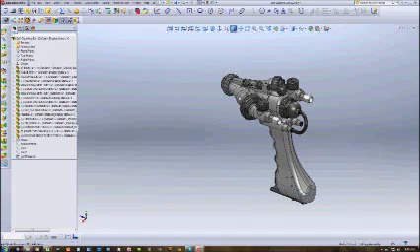This is Pat, and here's the Wagner spray gun. So we can kind of spin it around and take a look at some of this stuff. The gun was designed to solve a lot of problems. Some of the problems are as simple as just cleaning up at the end of the day.

And when you're spraying inside of tight quarters, overspray kind of flies around all over the gun. And so there's an overspray shield that goes over this. I'm working on that today. So just remember, one of the last figures in the patent is going to be an overspray shield that snaps over this. It's very similar to packaging. I had it on another design, but this design has me starting over again on that one. And we'll include that in the documents that are coming over.

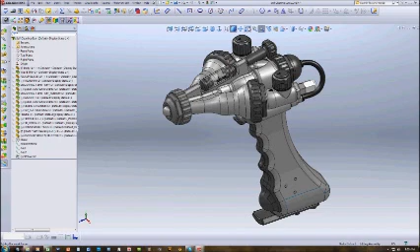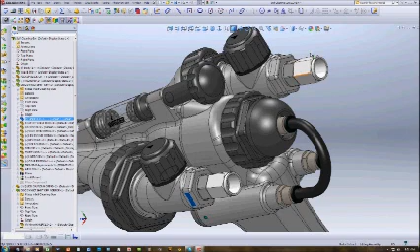So here on the right, this is polymers coming in. They screw into these stainless steel fittings in the back, and it's high pressure fittings. So these are actually swivels here, and this swivels and this goes into this aluminum body here. So these are mirror images, and we've got wrenches on the fitting here, so when you tighten it, you can tighten it up, and we'll probably put Loctite in this in production so this doesn't back out. And then these swivels, so you can disconnect your hoses here. So that's the incoming material.

So this gun is designed to work with what we refer to as off-ratio blends and polymers. So they're plural components, so one side comes in this side, the other side comes in here. Usually one is labeled A, which is the resin, and B is the hardener, generally an isocyanate. So we're going to work with epoxies, ceramics, urethanes, polyureas, polyaspartics, structural foam, insulative foam, and they'll all process through this gun.

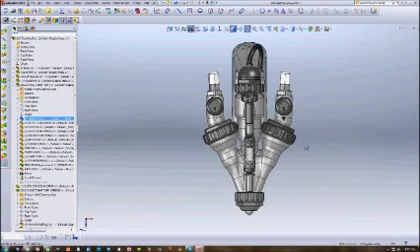And one of the problems that happens in a gun is that they jam up. And guns have been traditionally designed with tight tolerances, and this particular gun has loose tolerances, and we'll show you why. So there's working parts that are inside of here. The air comes in through the back to push a pin through, and the pin pops out here on the end. Everything's radial design. A lot of the guns don't have any radiuses, and this is used to eject stringers that are like stalactites that hook onto things.

And so this tip here is a ceramic piece. One of the problems is they've selected materials in the past like stainless steel or aluminum, and the material tends to heat up. It's operating at 180 degrees Fahrenheit, and so these materials tend to bind up, and then everything stalls out when valves are supposed to work. So let's take a look at the inside.

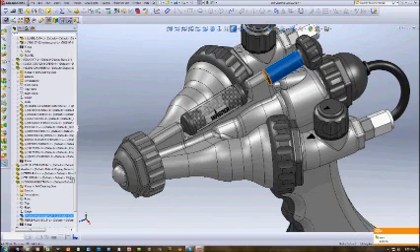While we're out here, this is the solvent right here, and there's a rubber piece here and a rubber piece there. We've got these little molded-in valves that are called duckbill valves. This feature right here is an over-molded stainless steel puncture device that allows air to pass in here. So we're going to pressurize this vessel, and then we're going to squirt solvent in here when we cycle and let go of the trigger. The trigger is down here, and that's what's in this handle.

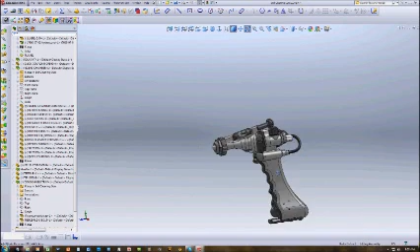A lot of these guns have all been made out of steel and aluminum. We have decided to design the bulk of this out of plastic to lighten things up. So this trigger is made out of a glass-filled nylon. The handle's made out of glass-filled nylon. This little crash guard, to prevent the handle from getting knocked when you drop the gun, that's going to be nylon also. These twist caps have a hand tightening feature and then a big wrench feature. These are going to be glass-filled nylon.

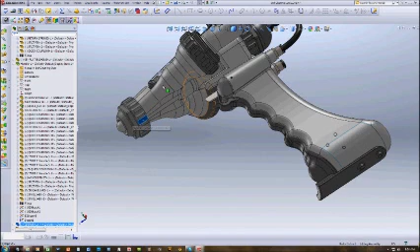This gun body right here, I'll open this up. This is going to be one of the few aluminum parts, and so this will be a sand-cast part, and these will all be machined out. And here's one of the chambers coming down through, and you can see that the shape of it lends itself to low pressure drops.

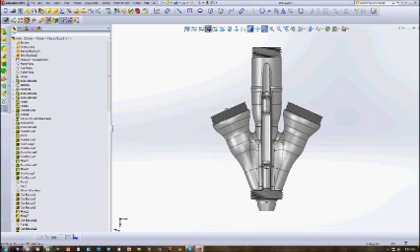So as the resins come in, they don't have to turn sharp right angles to mix, and we're all kind of flowing in an outward Y pattern where we won't have back pressure and everything wants to go out the tip. So this Y shape is pretty critical in an effective design.

So we've prototyped this in the past, and these are some of the air intakes here that are coming in, so we can activate this cylinder that's in the center. But let's close this part and move into the inner workings of the gun.

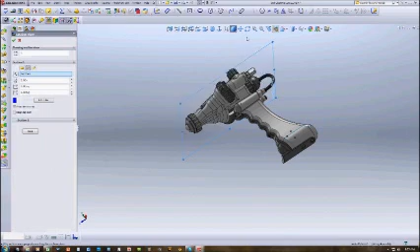So what happens is, if we take a look at the top view, nope, not that view, top view right there, and we'll cut a section through this, and we can spin it around. We've got some working pieces in here. Let me just zoom in and get this so we can look at it.

And you've got your A side and your B side coming in. You've got to have a check valve along the way. You'll see this shortly here. So as the resins come in, there's a valve that shuts on and off right here, and then it makes a gradual turn here. This is a keying feature, so your valves don't spin when you drop the gun.

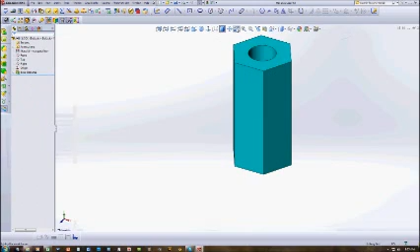This is a hex feature that'll just slip right in there. So that little hex part there, and then we've got this seal right here, so no fluids will leak out at this ring. This ring brings the assembly together.

So when we take this assembly off, we can shut off the valve, and then we can take this over to a drum that has the resins in it, and we can cycle it and get it hot. So as the materials race through the hose, they're getting heated, and we can get that drum temperature up quickly. So this has got an adapter that hooks onto a drum, but then it hooks back onto the gun here. So these are typical here. This one's shown without the hex feature in there.

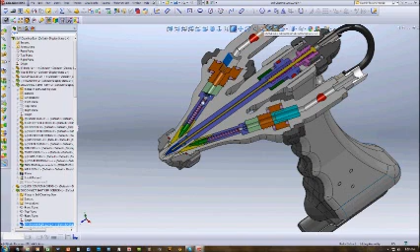And then as the resins come down, you can see that it's going through, and there's this screen that's trapped right here, and this screen can get replaced very easily. All this stuff was designed to be able to push out and clean. Most guns take hours to clean and get all these working parts that are a little bit different than this back in clean and working order.

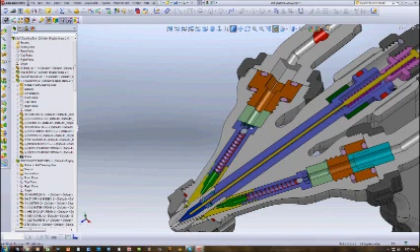The yellow down here, this is a seal that is used to wrap around the main pin here. Let me open this up just so you can kind of see this. So our resins come in, and this is going to be a flexible molded material that will mold over a steel pin that's in there. It'll be keyed on this flat here, so it can't turn, and it lines up with the striking pin that goes through here.

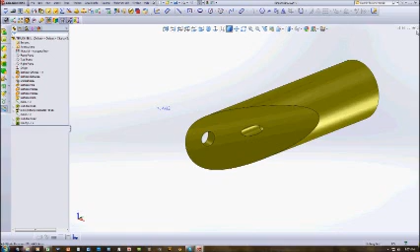This hole right here is an orifice to let solvents come in and clean out the chamber. So you'll see there's some solvent paths that we take. So when the air cylinder pushes this cylinder forward, this ceramic tip is mounted on the end here. It's wrapping around these yellow seals. The yellow pin here in the middle is a striker pin that gets delayed.

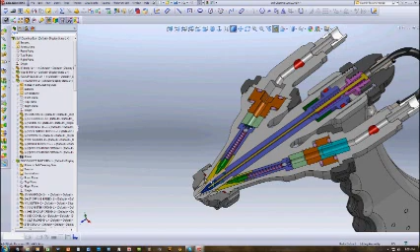So what happens is, when they let go of the trigger, an air cylinder pushes this purple part forward that's attached to the cylinder here, and it comes forward, and so now we're sealing off, and the solvents, or the chemistry, can't go anywhere. It's stopped right here, wrapped around this pin, and you have a big seal. Most guns that are out on the market have very small seals.

This is a stainless steel pin here that's used to handle some of the high pressure loads. Our loads coming in are going to be in the realm of 2,000 to 5,000 psi. And so you can see this spring that's trapped this ball here. The ball is a check valve. It's on both sides, so back pressure can't push resins where they'll mix back together. So that's why we have a check valve in there.

And anyhow, so this view is shown where the chambers are forward. Before the striker pin comes forward, we're going to inject the solvent into these little orifices. These orifices are very small. They're like 30 thousandths of an inch, 30 mil.

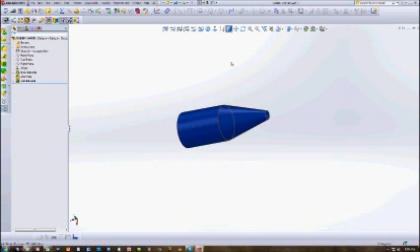And so the solvent will come through here, and it'll flush out all the A and the B sides. So we clear this out every time we let go of the trigger. This blue part is actually another synthetic rubber part, and it wraps around that striker pin. So we're not going to let any chemicals go back into the chamber that's working back there. So this is a rubber piece right here.

And so once the solvent goes through, there's a delay in timing, and this yellow pin strikes forward, and it knocks out any slugs that are in there. So then if you point the gun down, the solvents come down into here and go out. If you point the gun up, then air races through here. So it's kind of a three-purge system, and that's the essence of cleaning the chambers.

The chambers tend to plug up in here, and we get chemicals binding up. They cure at like 3 to 5 seconds, and so this tends to fail right in here, and then these working features right here tend to fail. The solvent is an ethylene glycol, which is radiator fluid, and it is used to lubricate and to clean. We've proven that the solvent is a great cleaning system for all of these polymers. It's one of the few things that lubricates and delaminates everything, gets everything off the surface.

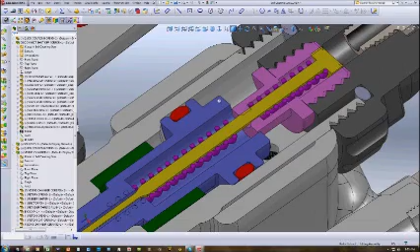So we will be injecting that solvent in. There may be a little bit of oil in there to lubricate, but when the whole pin assembly pulls backwards and our air cylinder pushes all of this back, so we've got an air port that comes in right here, and it's going to push this back, we will be able to then go in and start mixing the chemicals. So when they pull the trigger, that's when all this goes back. That's kind of the essence of it.

So when you pull the trigger, this will go back, it'll line up, and then the chemistry starts flying in here, and it mixes right at this tip here. So again, radial design to release these stringers. What do they call it? They call it bearding. Bearding is a technical term for these plural components when they start creating like stalactites at the tip here. So this shape here will tend to release it. Now all the air that's coming through here will help blow the stringers off.

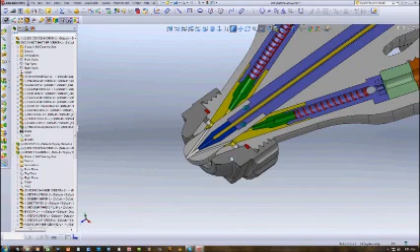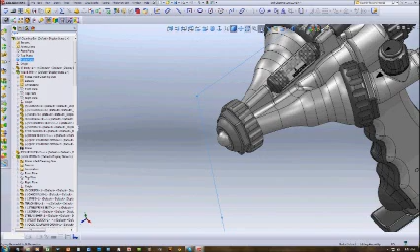So this is kind of what it is. There's an O-ring seal right here that traps all of this, so the solvents stay in here. This taper here is what holds it all together. So as the chemistry comes in, let's take a look at the next section view, which is the right view here. Let's take a look at this, and we'll section that. Okay. So now what we've got here is a view that pretty much shows how the solvent comes into the system. And I've got some solvent views in the patent drawings.

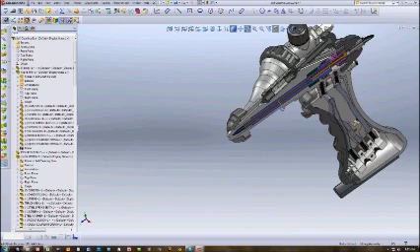And we've got airlines and everything over here, but let's take a look at what this looks like right here from a side view. There we go. Now, if we come in here, you can see this mechanical striker. This is going to be loose tolerance in here. The ceramic piece is loose toleranced, and so these tend to bind up in here when the chemicals start residing in here, and so we think that we can get more force in moving forward and reverse, because it's going to move backwards and forward.

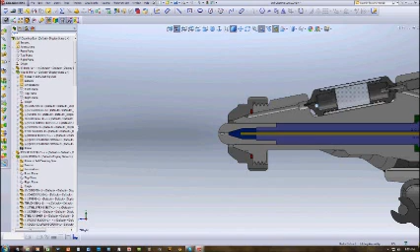So you can see how the chemicals mix right here at the end, and this striker pin will come flying through and knock out any slugs out of there. And this is our solvent path. So this is the duckbill seals that I was mentioning. Right here is a metal, the air comes up, it goes in, and we puncture the seal here, and we'll be able to introduce pressurized air in here.

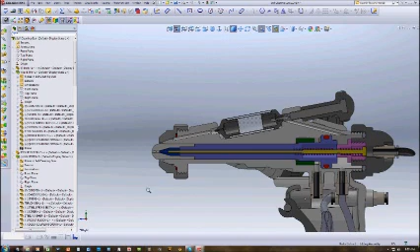When you point the gun down, the air pushes the solvent in. The solvent is butted up against here. This knob right here turns that in and compresses all this. And as the air comes in, or the solvent, it's pushing down this tube. It goes around this circle here, and then it comes out on the side.

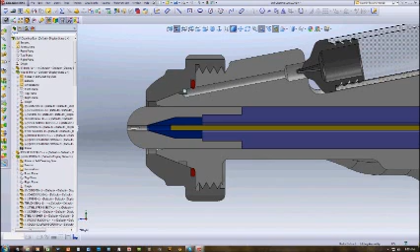You can't see it here, but that other path blows out all of the chemistry, the A and the B side on the chemistry. I don't think I have an O-ring shown right here, but actually, excuse me, the O-ring's right here. This is the fluid path for that. So here's the air coming in that the four-way valve pushes air out, and then it exhausts it out this side. So this goes back and forth.

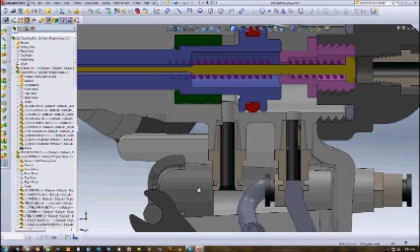It only travels about 3/8 of an inch, and then this pin right here will strike forward. Once this goes forward, the solvents get pushed through. This thing has a delay, and it strikes it forward. So you'll see the delay in the schematics. Here's the handle. Here's the four-way valve down here, and that's essentially it.

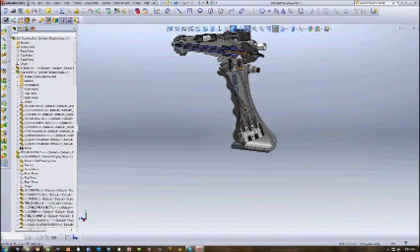So we have incoming air that actually comes in on this side here, and it goes down to the four-way valve and provides pressurized air from an air compressor. So your hose has incoming air, a positive air pressure of about 140 psi, and then we route it all around from inside the handle. And anyhow, that's the essence of the gun.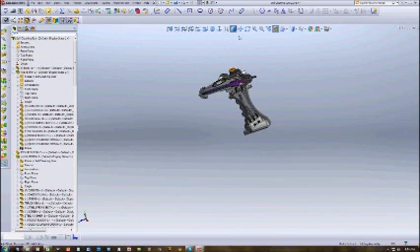Again, we've got an overspray shield, so there's two consumables. We've got this consumable here, and then we've got an overspray shield that you don't see here, and that'll be included. Let's take a look at the valve assemblies. I think that the valves have some unique stuff going on here. Let's see here, shut-off valve. So let me open this up here. This is the shut-off valve.

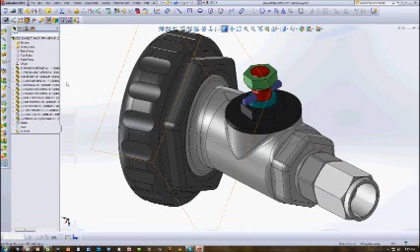I guess I am showing the spin dial on. Here, we'll turn it on, and then here's a label cap that goes on there. So this label cap goes on, and it's got arrows that point in the direction that the material is flowing. So when you're on, the arrow's that way. When you turn it 90 degrees, it's got a stop, and it stops.

A lot of systems, they get partially turned, and you get an off-ratio blend where the valve isn't quite open and you're not mixing properly, and the valve is partially open. So we've got some detents that snap this open and closed.

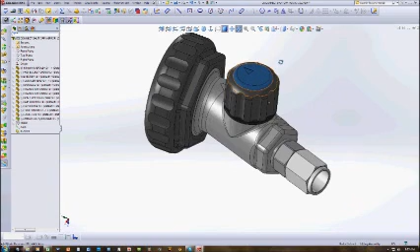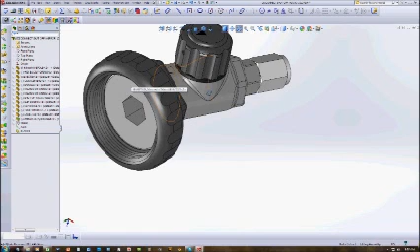Let's hide this. Actually, let's take a look at this ring here up front. So this is a sealing surface. Here's the hex that keys it so the valve doesn't unlock itself and spin. So our little hex will fit in there. And then there's an O-ring that seals up against this surface right here that you'll see along the way. And anyhow, this is our valve assembly.

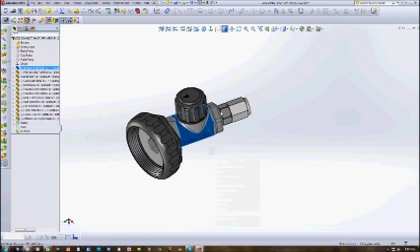Everything's got big wrenches and hand knobs, so you can turn it and tighten it up, and it can't back out. So that's kind of the premise. There is a right and a left to this, and I guess we can kind of hide this valve body, and you'll see that the seal right here comes in here, and the fluids flow through here. And this is a seal at the bottom, a seal at the top, and that's kind of how it works.

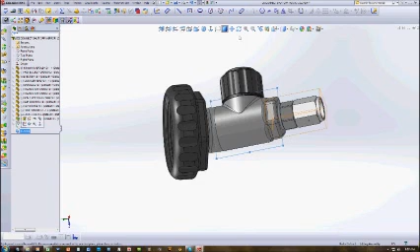So here, I'll turn this on and see if we can get a section view of this guy here, and you can kind of see the working guts of how the material comes through here. A little confusing down here with the hex and how that comes together, just because of the way we took the section view straight through the assembly. But anyhow, this is kind of the valve.

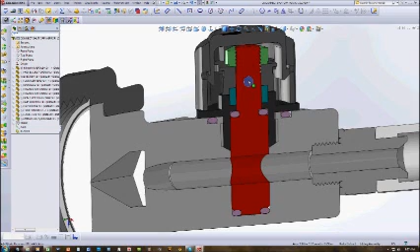This cap here is important for pointing the valve in the right direction, so it's a visual. It's got a little release here where you can stick a pin in there and pop the cap off, so you can get that out, and then you can work on this valve here. There's this dowel pin here that keys everything, and that's how that works. So I'm going to get rid of this, and we'll just go back to the assembly.

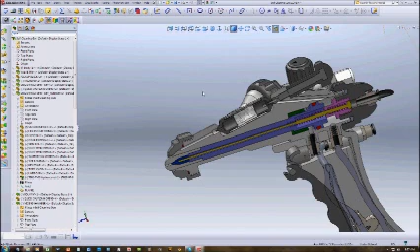See if I can get us an exploded view. We'll take this and we'll run it through the explosion that's pre-made here, and let's see here, explode. So here's kind of all the essential components coming together. This is that wraparound seal that I was talking about earlier, right in here. So this is kind of the key to the product right here. If I hide this, you'll see this is where the chemistry comes in.

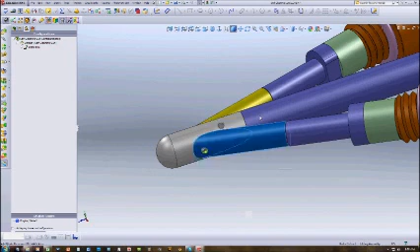Now we're going to size these in two different sizes, because off ratio means that you've got a 1-to-1 ratio, or a 2-to-1, or a 4-to-1, or a 5-to-1. So this chamber on this side and this on the other side will be porting how much fluid flows through here. So you can kind of see it highlighted there.

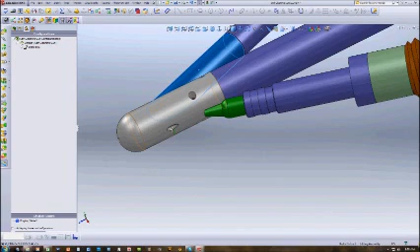And the key to this whole thing is this wraparound. A lot of people just use O-rings that they butt up against a flat surface, and it doesn't seal off, and it's a working surface. And this big, large surface here, I've proven that it holds higher pressures. So this is one of the key components.

I'm not sure why I can't turn that yellow one back on. It's buried in here somewhere.

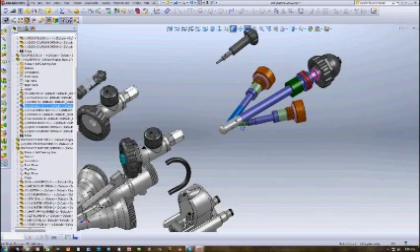But that's those guys. These parts here are aluminum parts, and they screw down, and they bottom out, and they set the pressure that this has against this round working surface on the ceramic part. So when we bottom out this feature right here in the body, this surface from here to the wraparound tangency establishes the pressure on here. So we can set that up, and people won't crank up the pressure too hard. So there's some dimensions that will hold tight there.

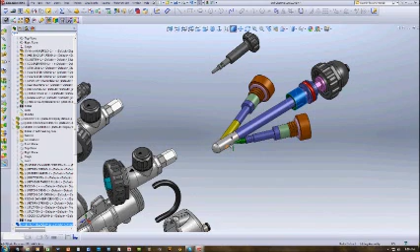But this is kind of the keying here. We don't want this pin to spin, because we want these holes to all line up. So back here, you'll see that this bushing right here has some flats on it, and these flats all key everything, and so the flats will prevent this purple part from spinning. Everything's keyed all the way up through the front here, so these all have to line up when they go forwards and reverse.

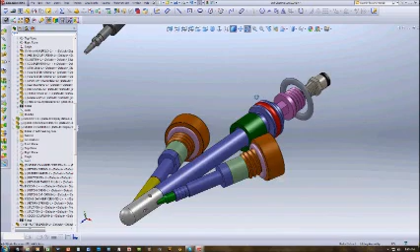This cap back here, I guess I can hide this. It's just a plastic cap that is going to allow air pressure to push this pin forward and reverse. So this is the striker pin that goes all the way through there. So that's a little bit of a tour there of the design, and hopefully that helps explain what's going on.

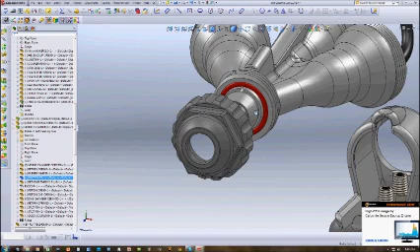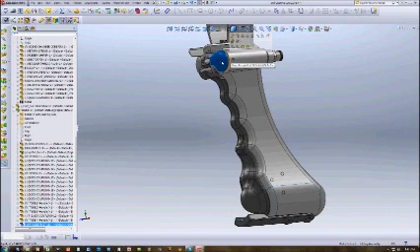And here's the gun body. It's got a little pivot hinge here that pivots and holds this handle in here. We've got incoming air on the right, and on the left we have exhaust coming out to do that striker pin, and then everything else is kind of running on the inside.

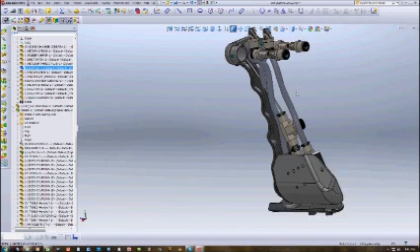Let's just hide this handle here for a second, and you can see there's a T here that sends air up to here, and at the same time it's going up to the back side that's going to provide air to the striker. So there'll be a delay going up here and an accumulator in here. You'll see that in the schematics. And then we've got this handle.

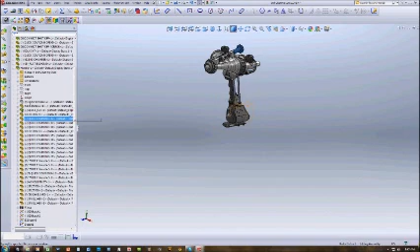Let's just go back to the unexploded view here. Everything's kind of laid out to be easy to clean, push out these valves, swap out mixing chambers because you're mixing a different chemistry one day, and cleaning up. I think that the cleanup on everything is pretty important. Let me get this handle back, and anyhow, so that's what we've got.

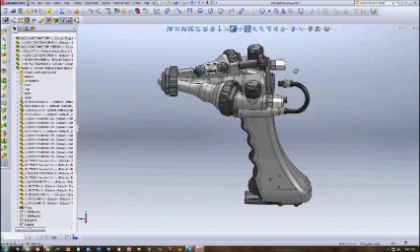Oh, we do have a case that all this stuff comes in, so you'll get 10 of these solvent cartridges. You'll be swapping them out a couple times a day, and depending on how many times you pull the trigger, we're going to measure increments of solvents that'll go through there. We're not going to use it all up in one shot, so we want to make sure that every time you let go of the trigger, it just cycles through and gets that going in there. So this is basically what we've got. That's it.